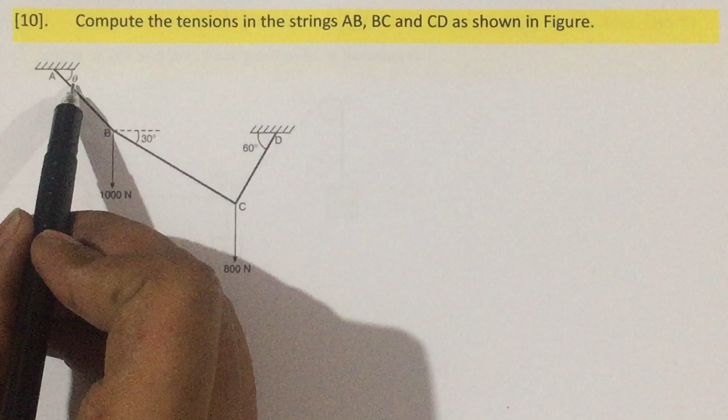This is the given figure. We need to find out tensions in AB, BC and CD. Here the angle is unknown. So we need to calculate TAB, then TBC, then TCD.

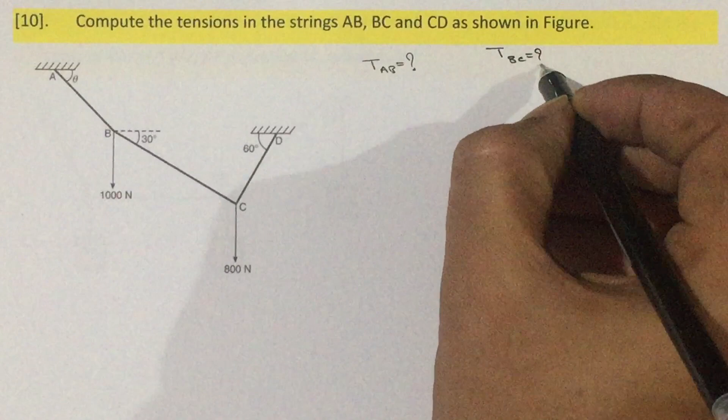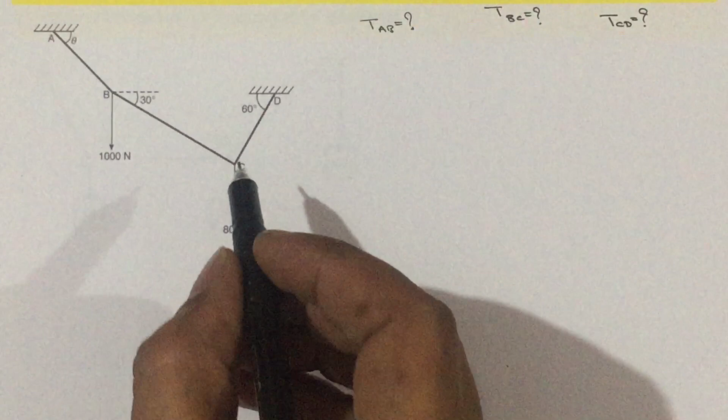So what do we need to do now? First, we will write the free-body diagram. Where do we need to write the free-body diagram? Where the multiple forces, more number of forces are acting. Suppose if I select point B, here you are going to get only BA, BC. What about CD? So we need to write another free-body diagram at point C. Let us write two free-body diagrams at B and C.

How to write the free-body diagram? That is within 5 simple steps. First, write the point at point B, that is at point B. Then write the connected lines.

Then direction. These members are subjected to tension, so outside arrow. Then weight will always act vertically downwards. Then magnitude, this is 1000. This one will be TBC and this one is TBA.

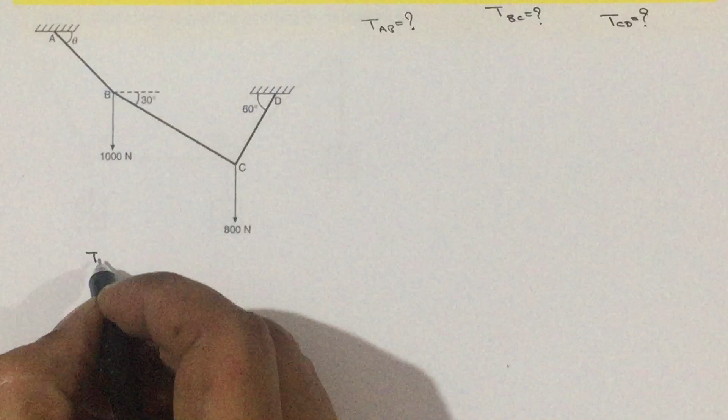Point, line, direction and magnitude is over. Then what we need is angle. So write the plus mark at the point, then write down the angle. This BA line is making theta with respect to horizontal. So write theta. Then this BC line is making 30 with respect to horizontal, that is BC with respect to horizontal it is 30. Then with respect to vertical it will become 60. Then if it is theta, then the remaining angle becomes 90 minus theta. This is 90 degree, this is also 90 degree.

And this will be the free-body diagram at B point.

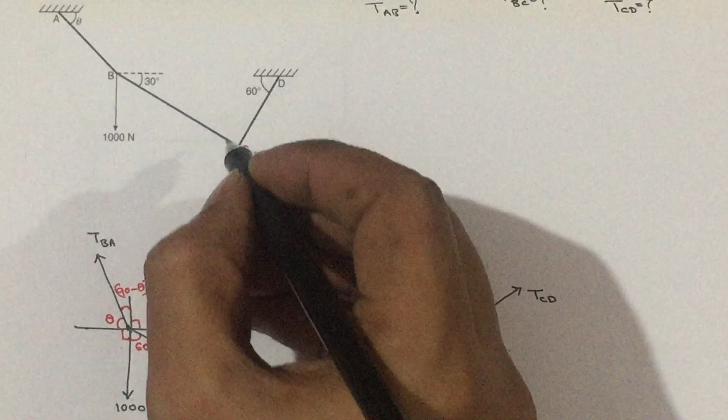Then let us write the free-body diagram at C point. For that, select point C, then draw the connected lines. I wrote 3 lines. Then direction, this is acting downwards. Since these two members are subjected to tension, write outside arrow. Then magnitude, this will be TCD, then this is CB, TCB, then this is 800. Point, line, direction, magnitude is over.

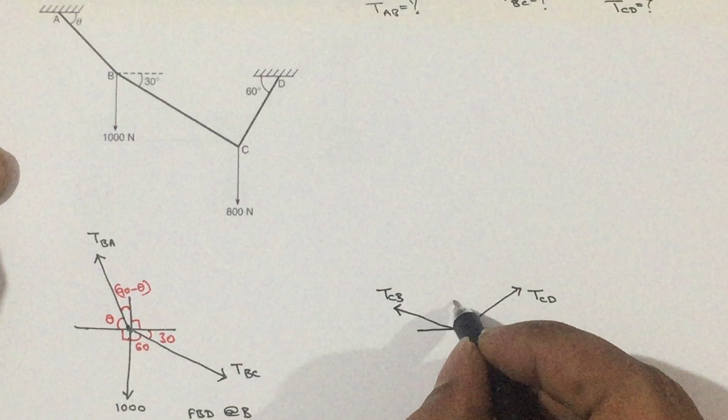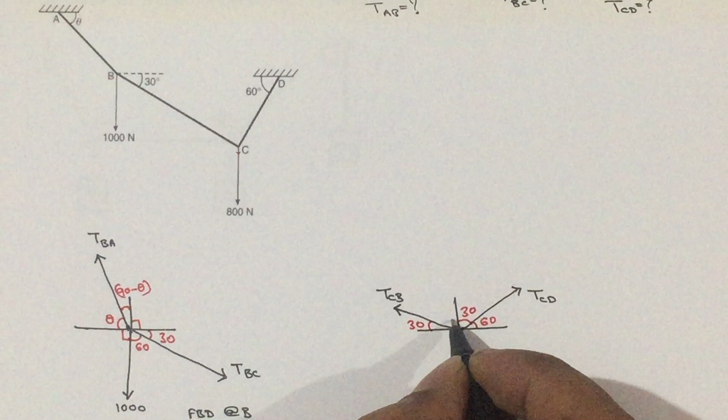Then what do we need? Angles. So draw the plus mark at the point, then CD line is making 60 with respect to horizontal. So write 60, then with respect to vertical it is 30. Then CB line is making 30 with respect to horizontal. Therefore with respect to vertical it will become 60, and this is 90. So this is the free-body diagram at C point.

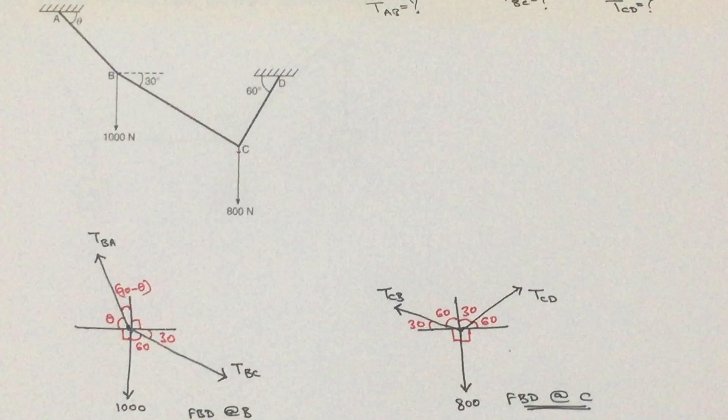So once you get the free-body diagram, now we need to choose the free-body diagram. For choosing the free-body diagram, count the number of unknowns. Here we have TBA, then TBC. Along with that we have theta. Theta is also unknown. No extra conditions like minimum force or maximum force are given in the problem.

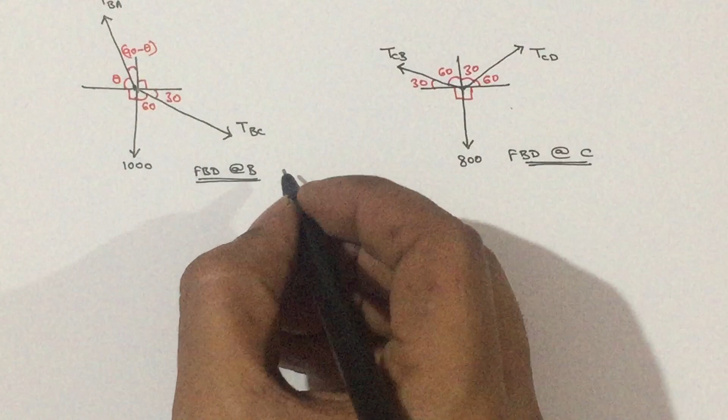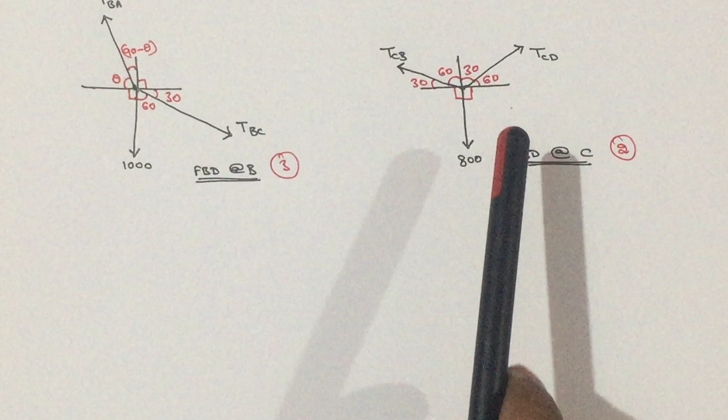So here we have TBA, TBC and theta, 3 number of unknowns. In this free-body diagram we have TCB, TCD, so 2 number of unknowns. Select the free-body diagram which has less number of unknowns.

Now choose the method. How to choose the method? Now we need to count the number of forces. So 1, 2, 3. 3 number of forces, and 2 unknowns. So we can make use of Lami's theorem.

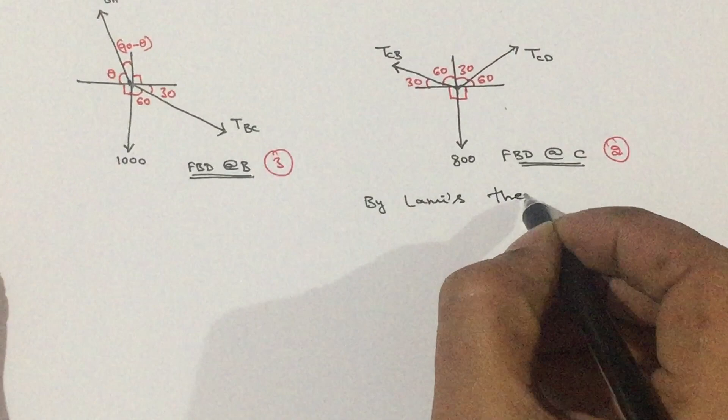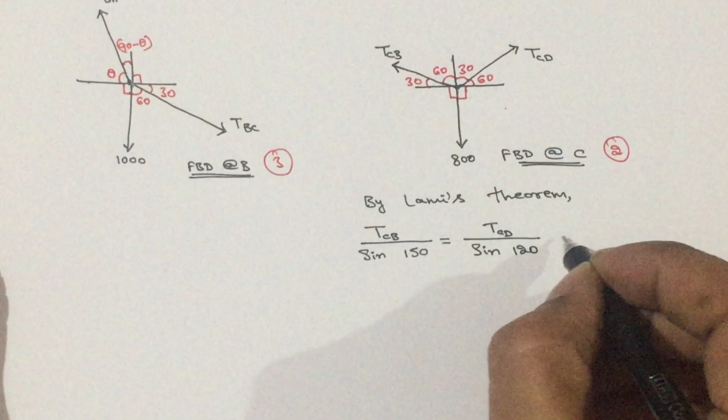By using Lami's theorem, we can write the equation as force divided by sine of the angle between the other two forces. So force TCB divided by sine of the angle between the other two forces, angle between them is 90 plus 60, 150, that is equal to the next force TCD divided by sine of the other two forces, TCB and 800, angle between them is 90 plus 30, 120, then that is equal to the last force 800 divided by sine of the other two forces, TCB and TCD, angle between them is 60 plus 30, 90.

We have 3 parts. Now choose any 2 parts such that there is only one unknown. So select the first part and the last part. So the unknown is TCB. TCB is given by the last part, that is 800 divided by sine of 90, multiplied by sine 150. So TCB you are going to get it as 400 Newton.

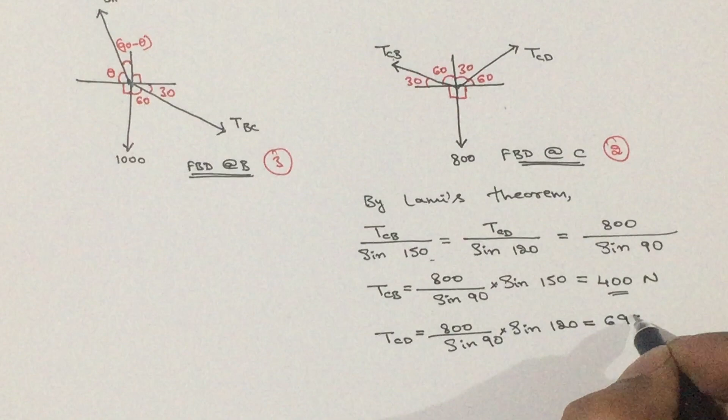Select the second part and the last part. Therefore, you are going to get TCD as 800 divided by sine 90, multiplied by sine of 120. That will be equal to 692.82 Newton.

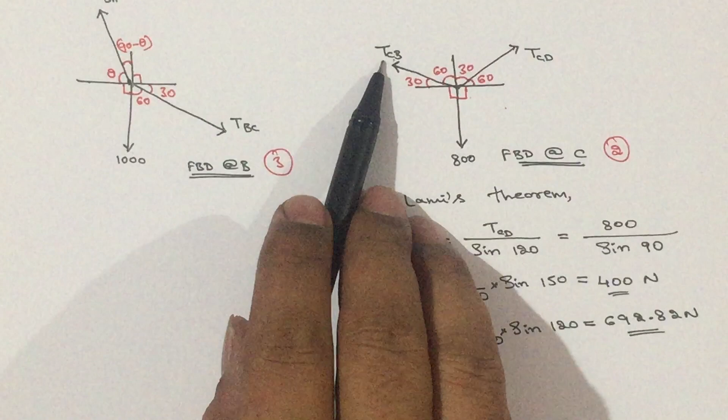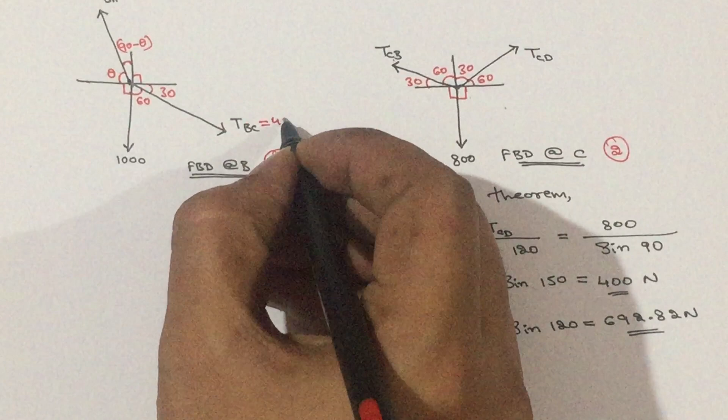So we calculated this free body diagram. Then we will move on to the next free body diagram. Here TBC will be equal to TCB, or in simple words BC will be equal to CB. So TCB we got it as 400 Newton. Let us write TBC also equal to 400 Newton. So we have the free body diagram.

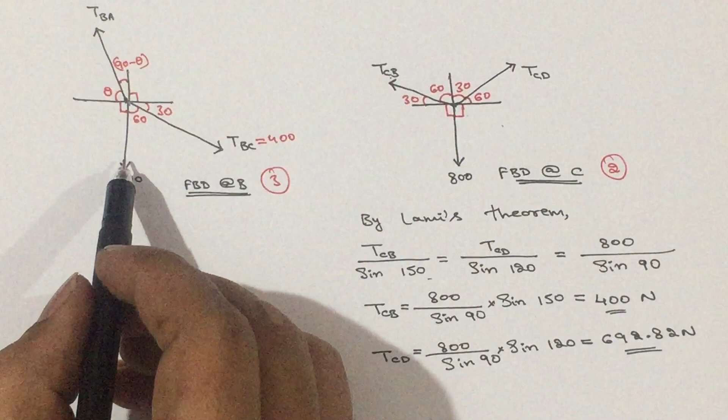Now we need to choose the method. How to choose the method? Count the number of forces: 1, 2, 3. Then count the number of unknowns. We have TBA as one unknown and theta as another unknown.

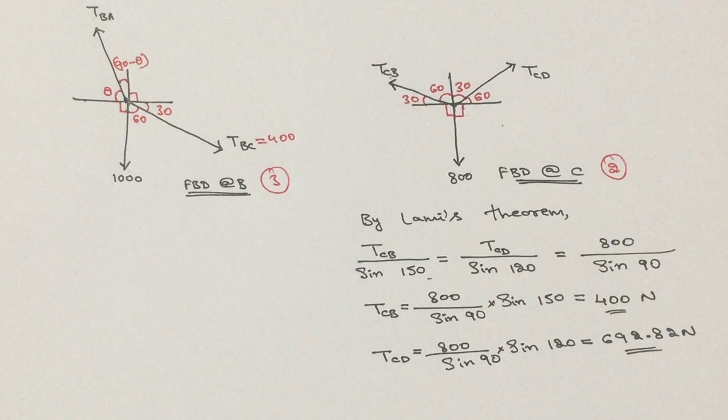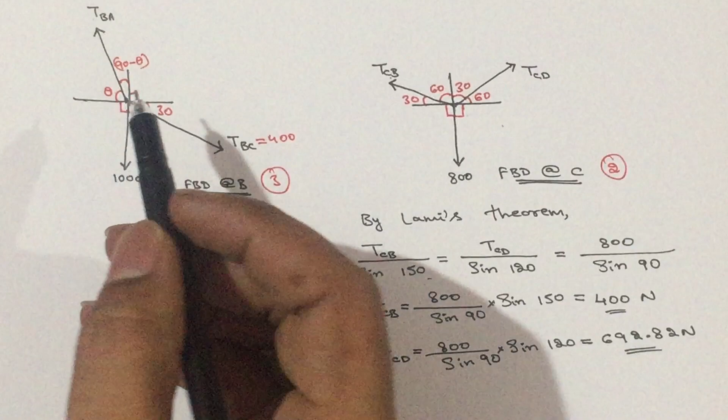You can think that we can make use of Lami's theorem. Yes, we can make use of Lami's theorem, but it will get complicated as the angle is unknown and no extra condition is given. So in order to simplify it, we will make use of equilibrium conditions whenever the angle is unknown and extra condition is not provided. So let us make use of equilibrium equations.

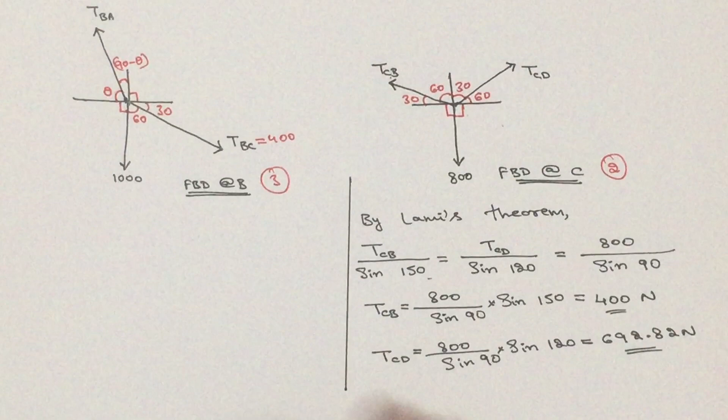By using equilibrium equations or conditions, since it is a concurrent force system, we have 2 conditions of equilibrium, that is sigma Fx is equal to 0 and sigma Fy is equal to 0. So let us take the first condition.

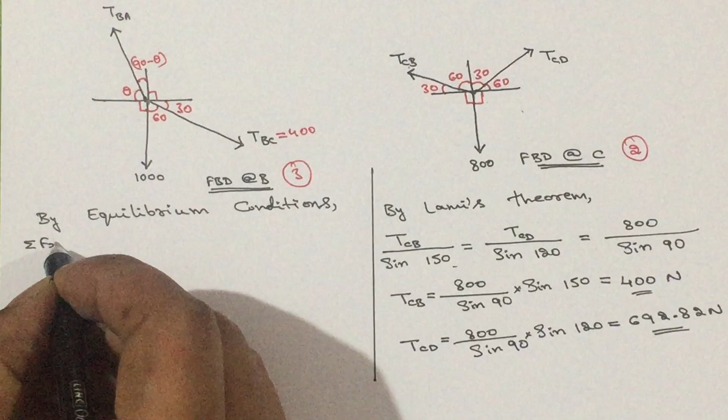Sigma Fx equal to 0, only the horizontal force and horizontal component. Before going to this, we need the horizontal angle theta and splitting up the inclined forces. For this force, theta is the horizontal angle, and we need to split it. How to do that? Behind the arrowhead, draw a nearby horizontal line and a nearby vertical line, for each force. So calculate Fx equal to 0, horizontal and horizontal component.

I will start from this force. It is vertical, leave it; vertical component, leave it; horizontal component moving rightward is positive, then the component is F cos theta, that is 400 into cos of horizontal angle 30 degree. Then here vertical component leave it, horizontal component is moving leftward, component is F cos theta, that is TBA into cos of theta, that should be equal to 0.

So we will get TBA cos theta equal to, keeping the unknowns on one side and the known term on the other side, you are going to get it as 346.41. Take it as equation 1.

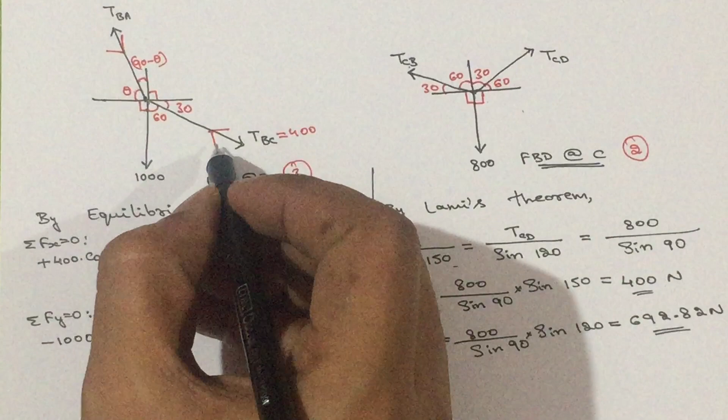Then next apply the second condition, sigma Fy is equal to 0. I will start from this force, that is minus 1000, then horizontal component leave it, vertical component acting downward minus, then F sin theta, 400 into sine of horizontal angle 30 degree. Then here horizontal component leave it, vertical component is moving upward, TBA into sine of theta, that should be equal to 0.

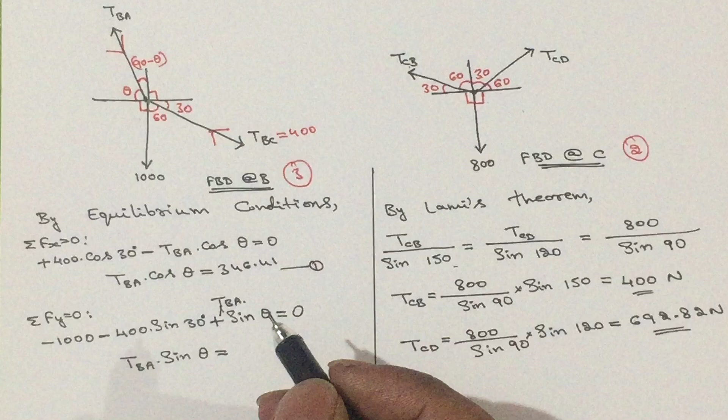So here the unknown is TBA into sine theta, write it on one side and all other known terms on the other side. You are going to get it as 1200. So take it as equation 2.

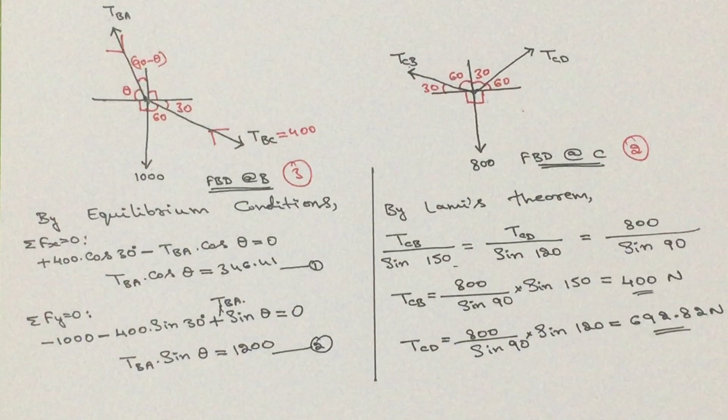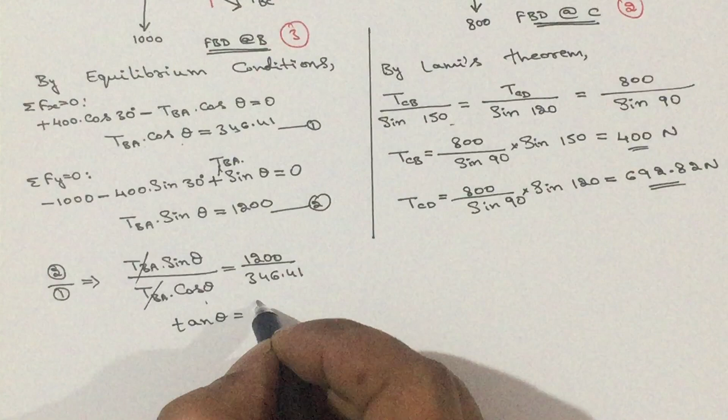Then by using equation 2 divided by equation 1, we are going to get TBA sin theta divided by TBA cos theta, that should be equal to 1200 divided by 346.41. Here TBA gets cancelled, sin theta by cos theta is tan theta, that is equal to 1200 divided by 346.41. Therefore theta is equal to tan inverse of this value. You are going to get theta as 73.90 degree.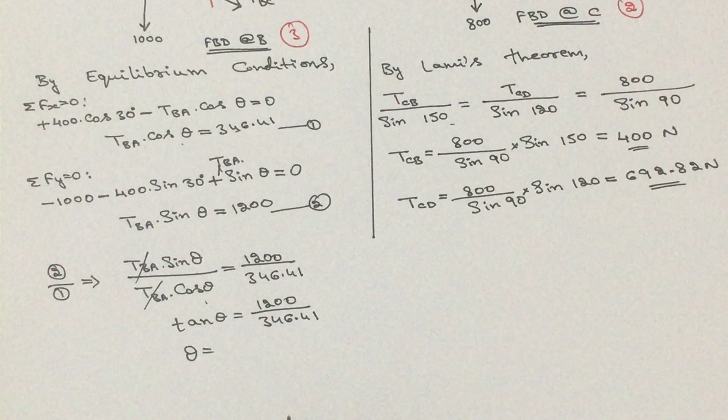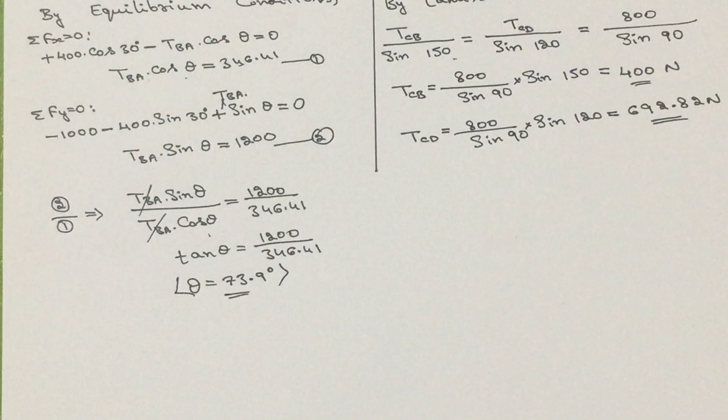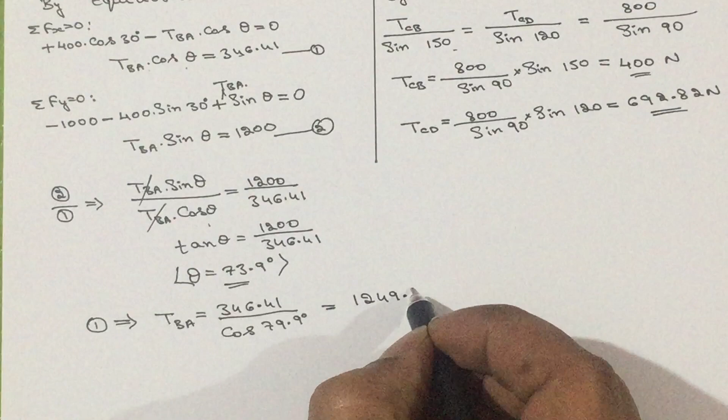So once you get the theta value, you can substitute it either in equation 1 or equation 2 to get the answer. Let us substitute theta in equation 1. We are going to get TBA equal to 346.41 divided by cos theta, that is cos of 73.9 degree. You are going to get TBA as 1249.158 Newton after calculation.

So we calculated the tension in all the strings as shown in the figure. We calculated TCB, TCD and TBA. That is all for this problem.